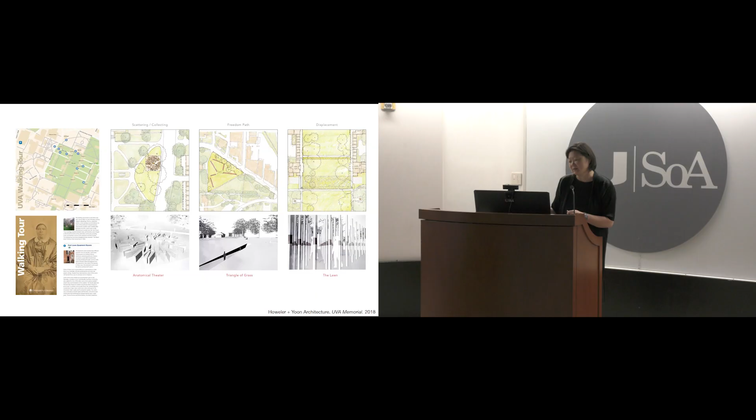We were surprised by how some of the ideas that we thought were the strongest and most compelling were of no interest, particularly to the descendants of the enslaved.

The right scheme was one of my favorites, and it was a purely ephemeral memorial where we would plant crocus plants, and they would bloom every spring and turn the lawn purple. But what we heard from the community is they wanted a physical space, a place to do the kind of reckoning of this history, a place where the community could gather. Ultimately, it was clear that the memorial had to create that space.

The idea of a kind of gathering in a circle—this is an ecstatic dance called the ring shout. And these ideas of gathering together to commune and pay respects became the driver for the design of the memorial.

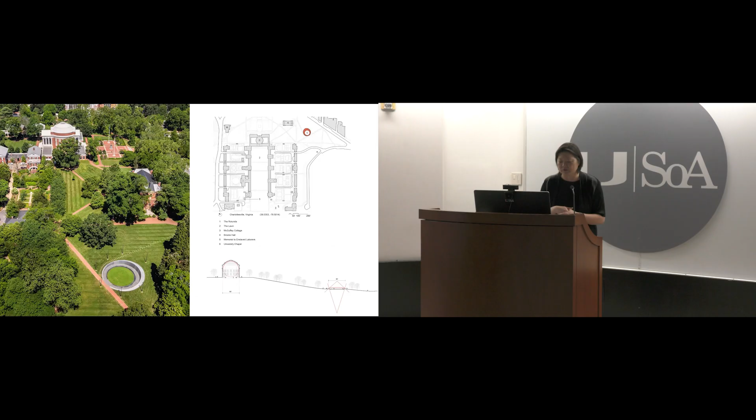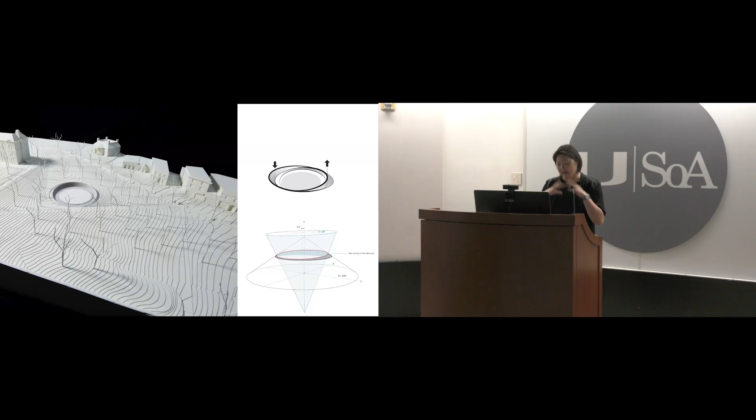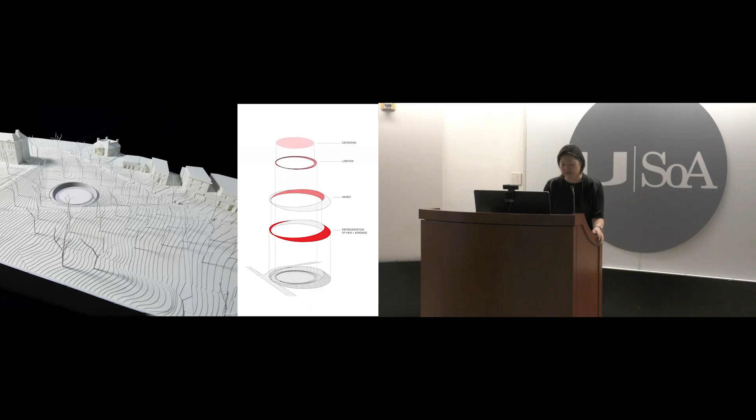So it's on one hand quite simple. It's a circle that intersects a path on a tangent. The diameter of the memorial is the same as the diameter of the rotunda, but the difference is the memorial is essentially two intersecting cones, a conical section that's open to the sky versus enclosed. That simple geometry gives us a place to gather and several surfaces to honor the enslaved, and try to capture in the materials the history as well as the present.

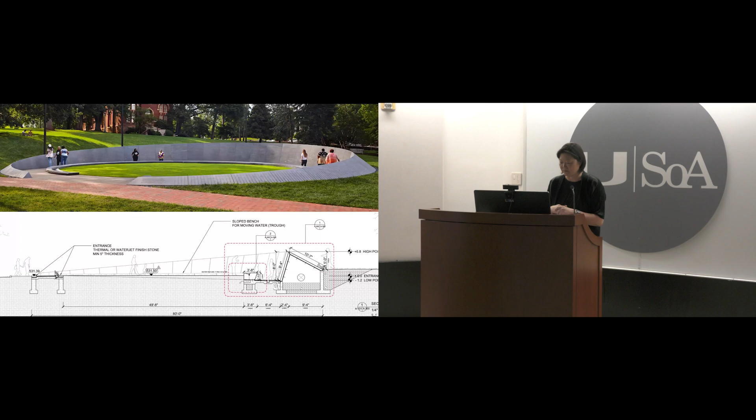So essentially when you enter, it's like a curb—very, very shallow—and the ramp slopes ever so gently down as the wall slopes ever so gently upwards. So it always creates a kind of openness, and a sense that there's no way to be out of sight. But when you're within it, it creates this kind of human scale to the project. The wall reaches 8 feet high, and it essentially creates a new horizon line in that landscape.

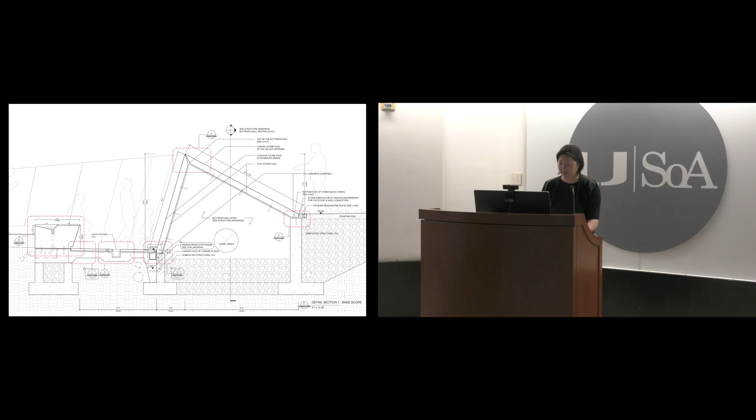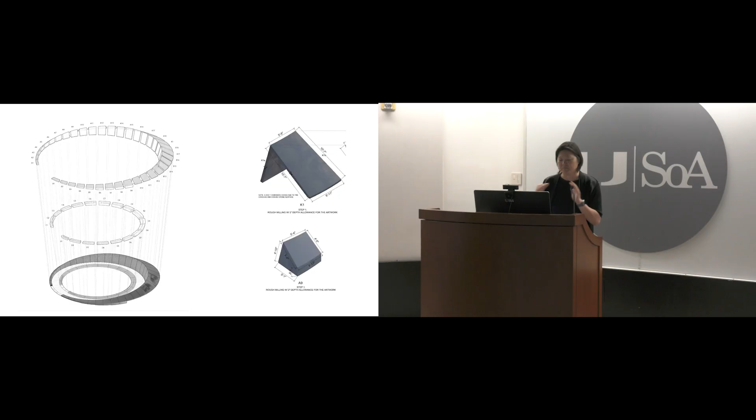And we worked on that horizon line very carefully through these full-scale mock-ups, really focused on how to create that line in the landscape where both the solid blocks of stones and the planar stones can come seamlessly together to create that horizon line.

And because there were an inner surface and an outer surface, the approach to them was quite different. The outer surface, we were really conscious of the kind of material artifacts of the time, these unmarked gravestones that were really rough because they were not honed—there wasn't the ability to hone those stones at the time. And we saw each surface as telling a part of the story of this history. So the outer surface has this kind of rough-hewn element like the tombstones.

And they're created by both the kind of striation and the scalloping of the surface. And in seeking whose voice to lift, we settled over time on Isabella Gibbons—her words. She's the only enslaved person that we have a photograph and a description in her own words, as well as a first and a last name. So the memorial starts with a quote from Isabella, and we worked with amazing artists, Eto Otitigbe, who did this piece called Becoming Visible.

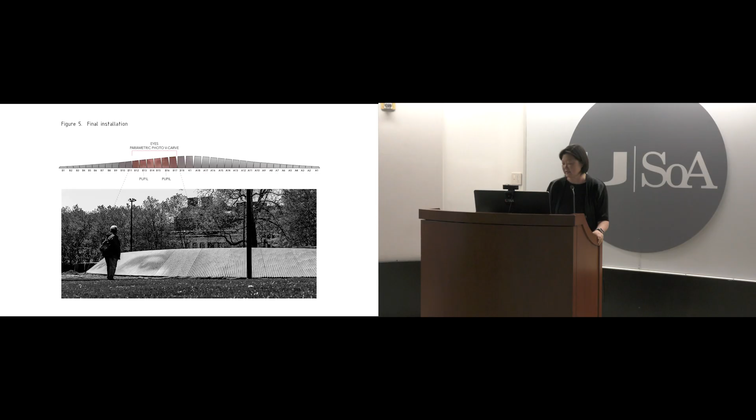And one thing the community wanted was a literal representation. The abstractness of the memorial, they found, did not do enough work in terms of the literal representation of an enslaved person. So we took Isabella Gibbons's eyes to a colossal scale, and then carved her eyes into the stone through this V-carve method that's overlaid on the scallops, and worked hard to make that legible. So if you're there at certain times of day when the light is just right, from a certain angle, you see Isabella Gibbons's eyes staring back at you.

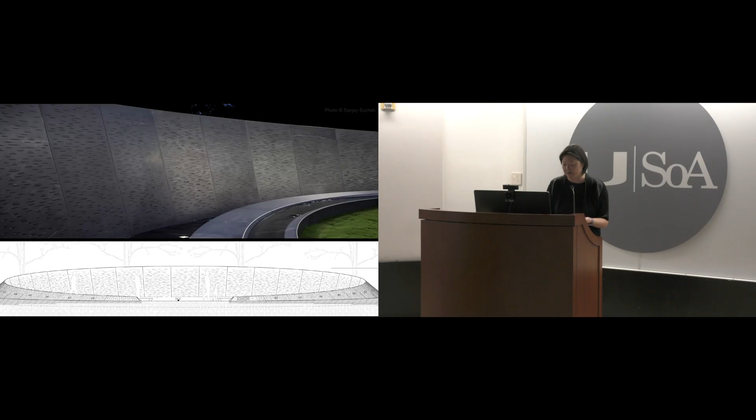We also struggled with how to represent the individuals. In a memorial, typically you have names, and here we know there were 4,000 enslaved people, but the records of their first and last names are in fact very, very few. So we made the decision to create 4,000 memory marks, and where we knew a name, a first or last name, a kinship relationship, or a skill, or their craft, we added it to create this kind of genealogical cloud.

And these cuts in the memorial are also crescent shaped and dig deeper. So after it rains, the water is held in that cut just a little bit longer while the surface dries around it, and then cries or bleeds the water after a storm.

And the memorial was opened during the pandemic, just after the murder of George Floyd. And we saw one person there taking a knee, and then a few more, and then a few more, and then many, many more.

Universities have long legacies, histories that often need repair. But universities, I think, also play a role in not only American values and ideals in terms of American universities, but I think they have a role to play in fostering democratic ideals, new knowledge creation, justice, truth. And so a project that we are working on right now at the University of Virginia is the design of an Institute of Democracy.

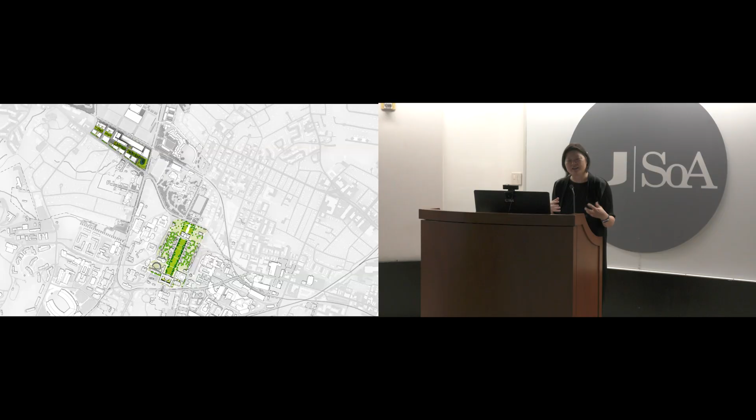And it's really interesting, having worked on the memorial and understanding the history and the important history of that academical village. UVA is expanding on this Emmet-Ivy corridor, and there's new disciplines, and those new disciplines like data science need new buildings, and so there's a kind of encapsulation of the moment of knowledge today.

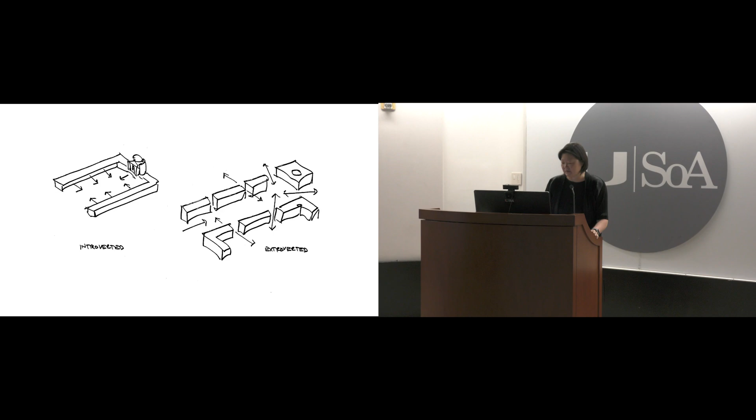And the decision was made to have the buildings terminate similar to the way Rotunda terminates the academical village, with the Institute of Democracy. But the difference is we wanted to create a kind of porosity to the building. We considered it a building with many doors.

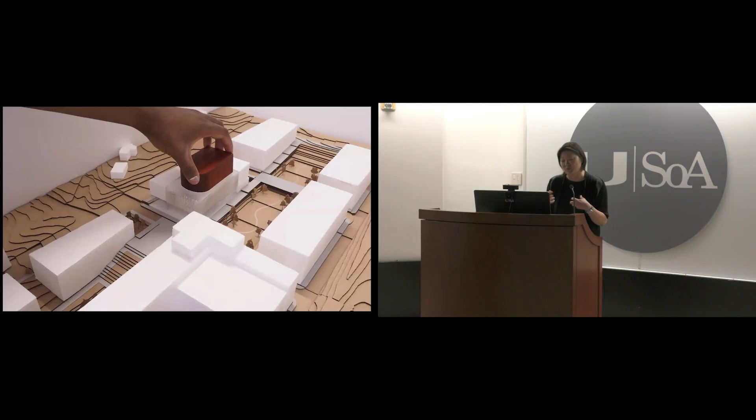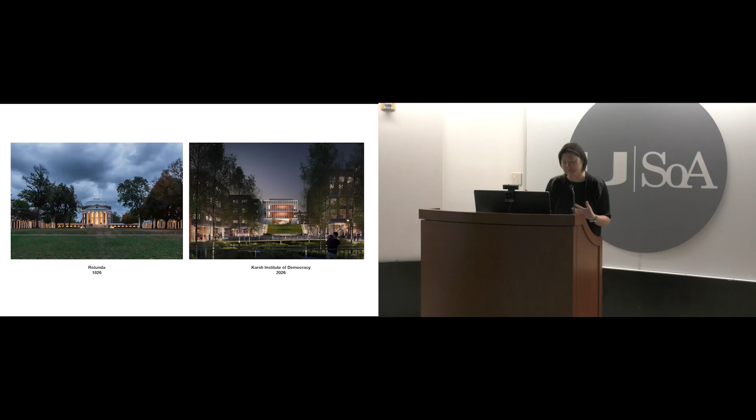That's anchored by a place of gathering and a place of discourse and debate, which is the hall. There's some relationship between the rotunda and the Institute of Democracy, in that they both terminate an axis, but there are many differences. In building in this context, one has to balance that reference to history with the new.

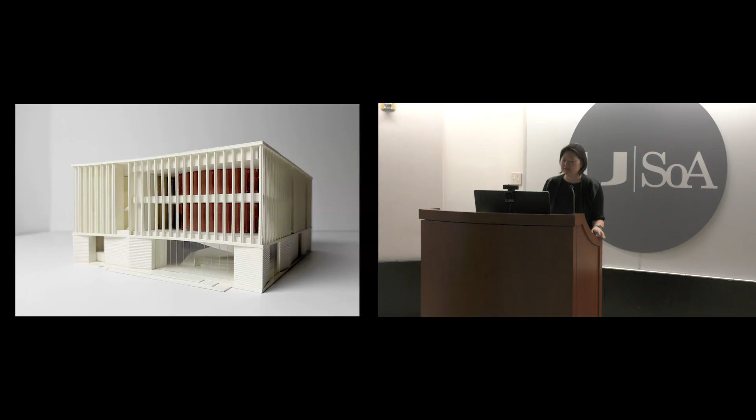The rotunda then becomes the deep red—here it's wood versus brick. But the organization of the building is really based on new knowledge production, deep research, and then discourse and engagement.

With the public, and engagement in debates through these public events. So the diagram of the building really is this simple: it's like two L's framing the place of gathering, or the auditorium.

So we made it 360 so that it's not left, right—there are many layers, and you could have every vantage point within the space.

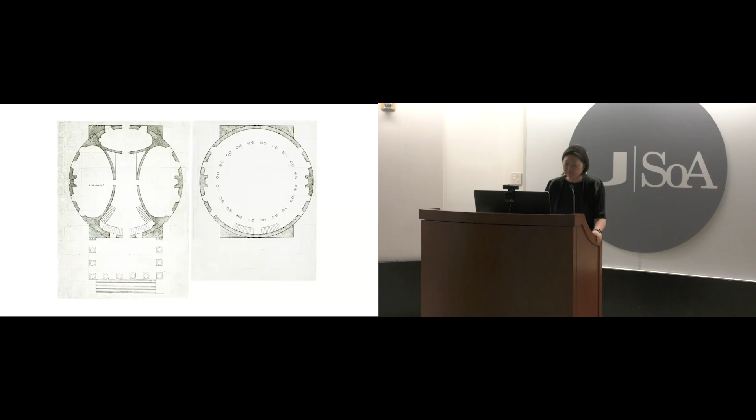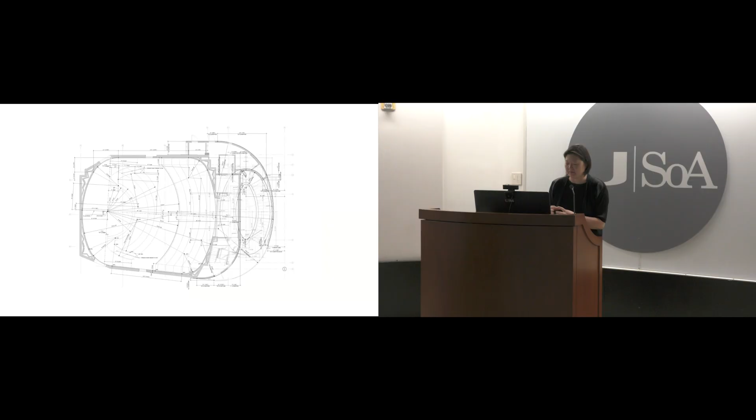And those geometries, which are really pure in the rotunda, are a little modified in the auditorium. So this is both the stair and the auditorium, and also a boardroom.

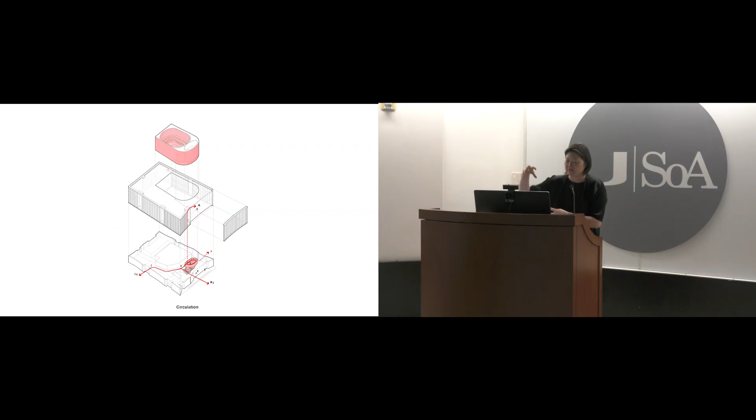So things are under construction now. We call it the avocado, but the auditorium is then connected to the ground through this tail, which is a spiral stair that takes people directly up to that event space from grade.

The other thing about the building we wanted to make sure is that there are multiple centers, and those centers are outside of itself, as opposed to a kind of simple axial relationship.

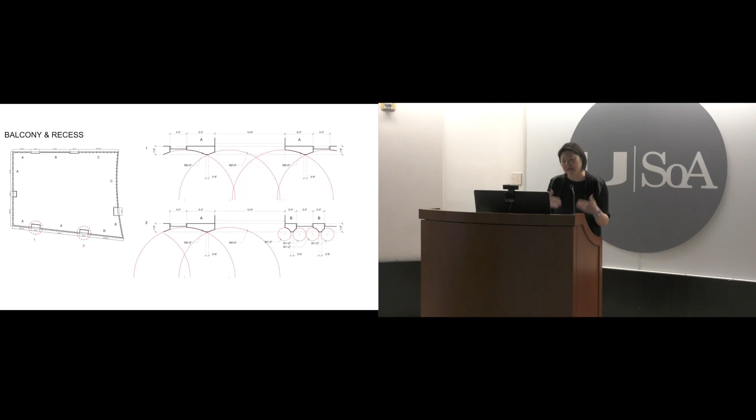And so even in the thinking through of the piers and the envelope, these precast piers reflect all those geometries that are external to itself.

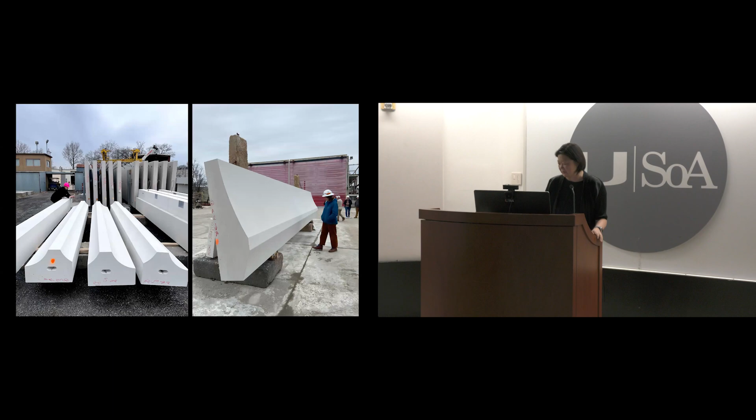And so this is the individual elements that create the different scales between the research wing and the auditorium wing, and then coming down on the cornerstones of the building.

And the last thing that I think ties it back to the memorial for enslaved laborers is that we had the opportunity to create a pilot project in the Design for Freedom movement, where we are going through the process and requiring the contractor to go through the process to document all the procurement of all of the materials of the project, to ensure that there is no enslaved labor throughout the material sourcing.

I wanted to share—often we think adding something is purely additive. But some of the recent work we're doing has put a deeper understanding, and sometimes you need to add in order to preserve.

So I'm going to share a few adaptive reuse projects that are quite different. The first is this Coolidge Corner Theater in Brookline. It's a nonprofit independent movie house, and they have this beautiful old theater, and a desire to create an addition in order to preserve it.

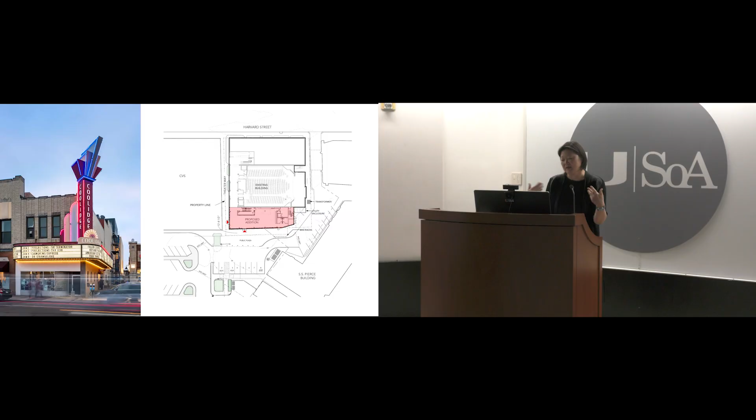So we were asked to do an addition that would turn the back of the theater into a new front, provide it with two new theaters that would allow it to meet code and accessibility requirements, elevators that it needed. But it also allowed the theater to remain in operation during the construction of the addition.

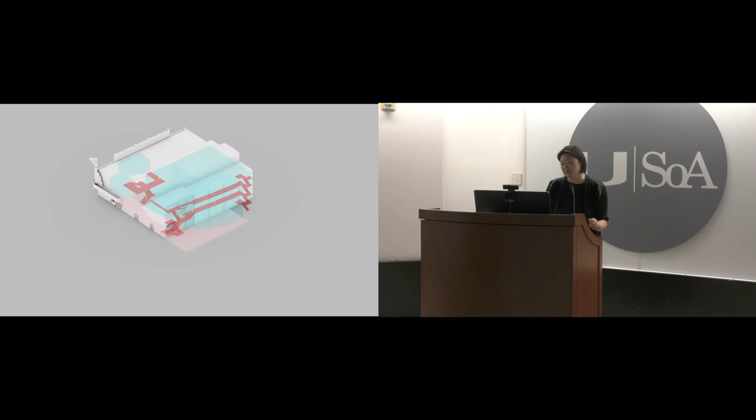So it's very straightforward: two new theaters, new integration of the circulation route. And you can see the kind of line between the new that enabled the old to be preserved. The theaters are just two theaters, very different in scale.

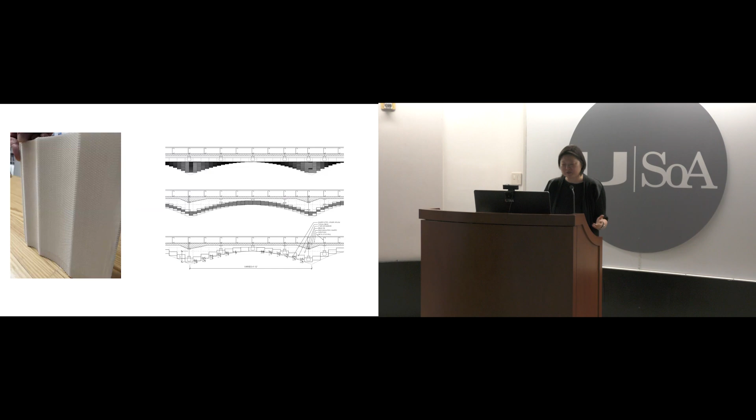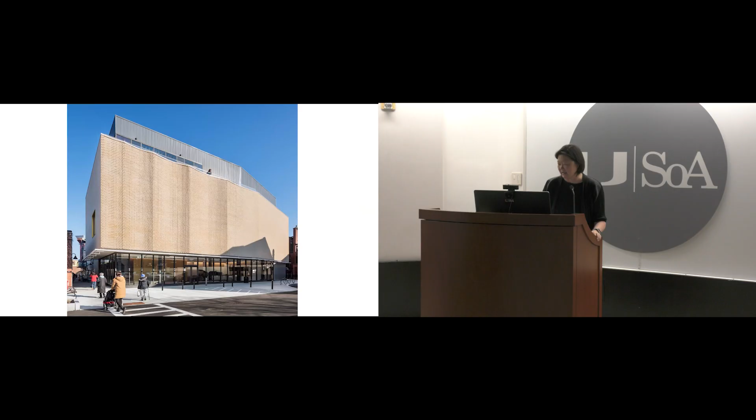And because this building is Art Deco, one of the requests they made was to make sure the building was deco. We struggled with that quite a bit, but in the end we utilized similar material as the original theater building, and created this undulating facade that has that quality of billowing curtains, but is all done through hand-laid brick. At night, it really captures that sense of expectation.

A very different approach to adding to preserve is a project we're doing in Buffalo. This is the new Lipsey Architecture Center, and it is part of this larger complex called the Richardson Olmsted campus. At the time, the language used was an insane asylum, so this was a large campus for the mentally ill, and it has its own storied history.

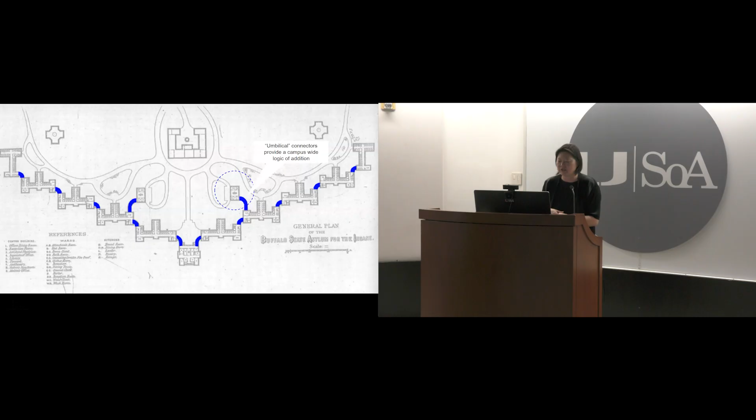We have both the opportunity to preserve this building. There's so much embodied carbon in our buildings, but this building is too small to house the architecture center. And the economy of Buffalo has become one tied to tourism. So the desire was to create a new structure that didn't compete or try to look like the original, but one that would be quite iconic, different but iconic, and part of the attraction of coming to the site.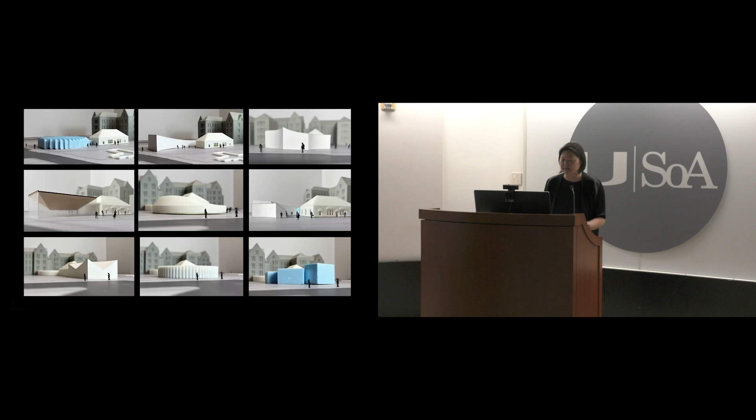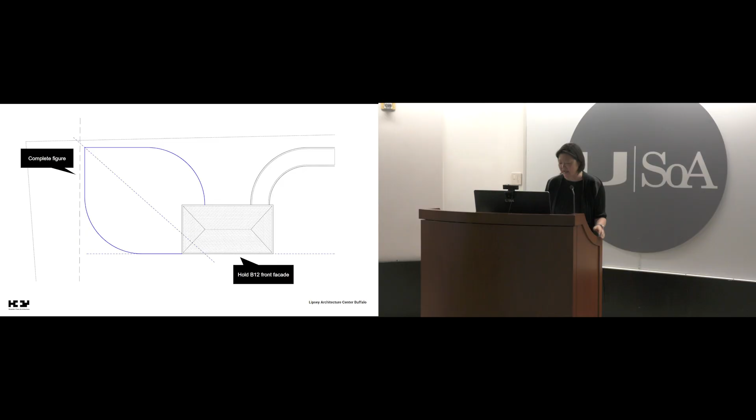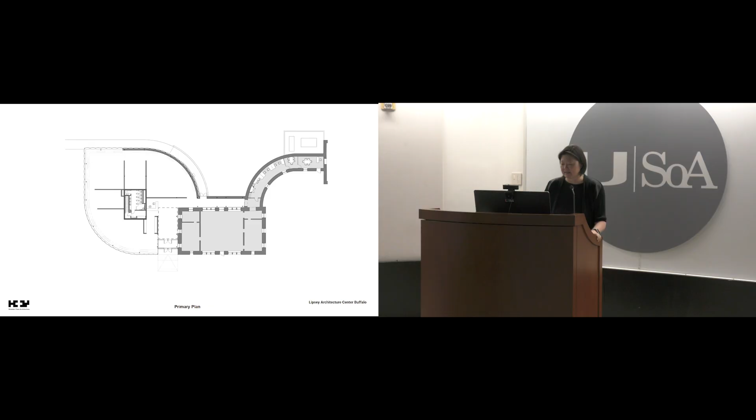So we did lots of different models, and in the end, we found resonance with a very simple scheme where we simply mirrored the geometry of the connector piece. We mirrored it again to complete the figure. We created an entry between the old and the new, organized all the support services in the center with the galleries pinwheeling around, made sure it was diminutive to the roof line of the existing structure, and then clad it in these curved pieces of glass.

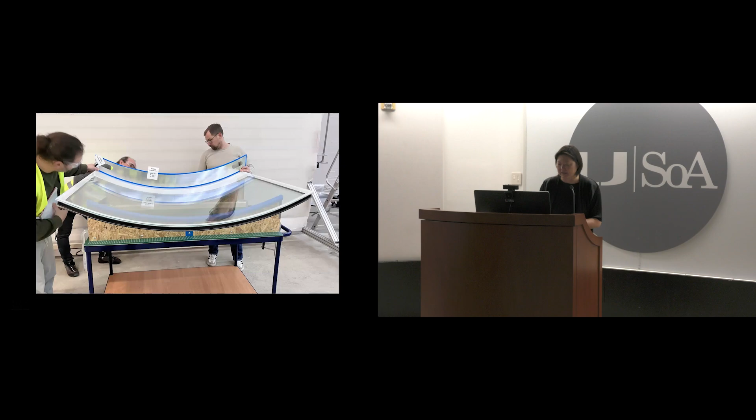These curved pieces of glass have been really interesting to work on in terms of thinking through the mullion, and whether we could do this as an almost mullion-less system. We're working with a glass manufacturer in Germany to fabricate these pieces. So these are the early mock-ups that you're seeing, and it's under many feet of snow in Buffalo, and should be completed hopefully by the end of the year.

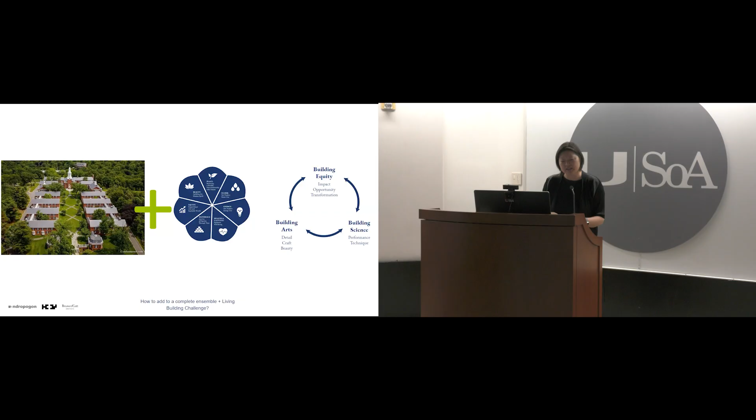Another kind of add to a historic site is a project recently completed for Yale. Yale's Divinity School was really based on the academical village at UVA. One of the opportunities here was our first chance to do a living building challenge building. This was in collaboration with Bruner/Cott and Andropogon. Really, the living building challenge expands things from just performance and sustainability to equity and beauty as part of the criteria for meeting the challenge.

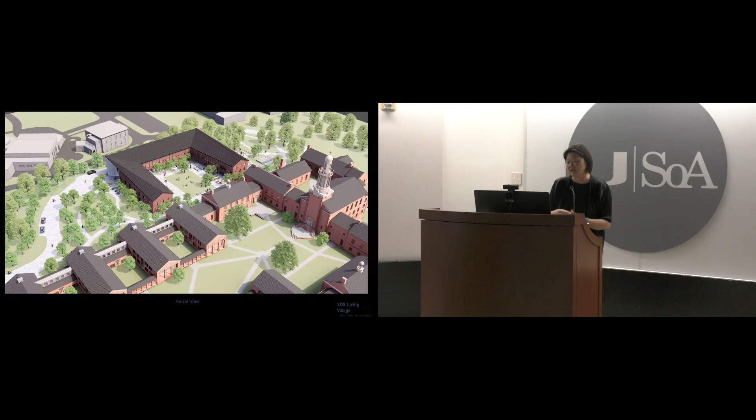And there, the kind of axial orientation of the campus was no longer viable in its expansion. No one could find the right door. So the decision was to make a kind of courtyard space that would essentially house another 50 students. So this is a 50-bed dorm, but what's incredible about it is the research and development of

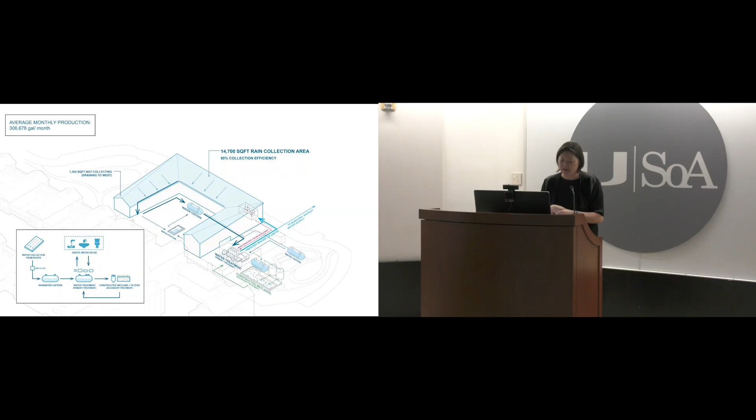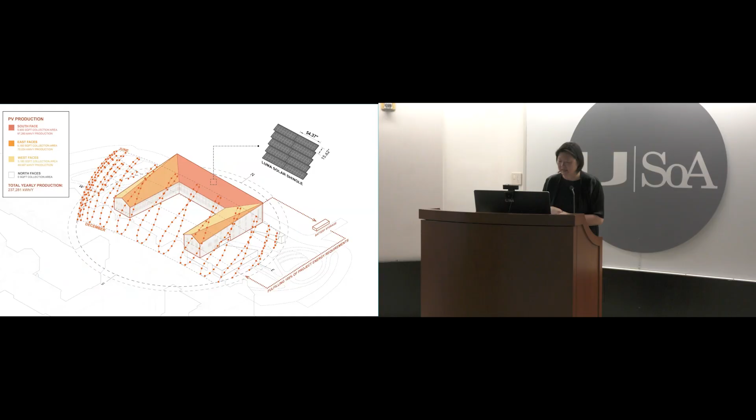incredible resilience and sustainability standards. So the goal is to produce more energy than the site can consume. The whole roof is a solar panel. We worked on tweaking the geometry to maximize the harvesting of solar energy. The technological advancement of these panels now, in the form of roof tiles, is shocking in terms of how well those products perform.

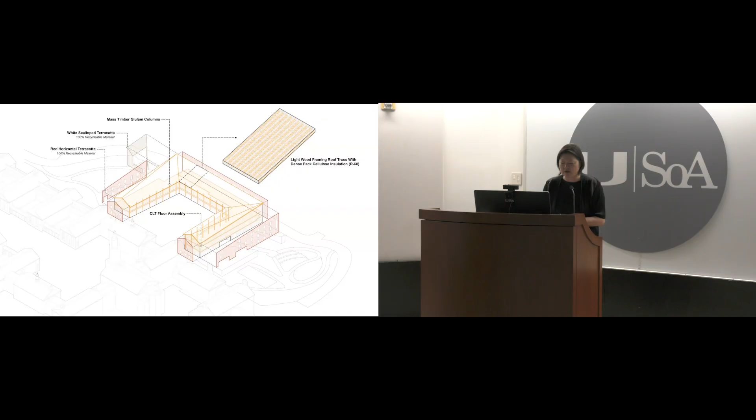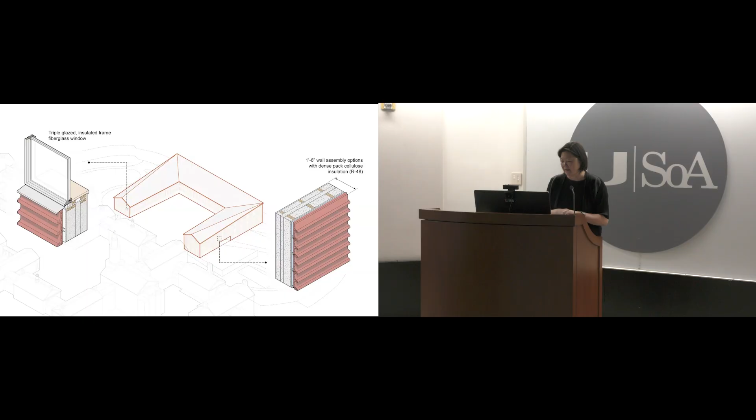The building is essentially mass timber, cross-laminated timber, glulam structure. So it's almost all wood. A lot of that CLT is exposed, triple glazed, and then terracotta for the skin.

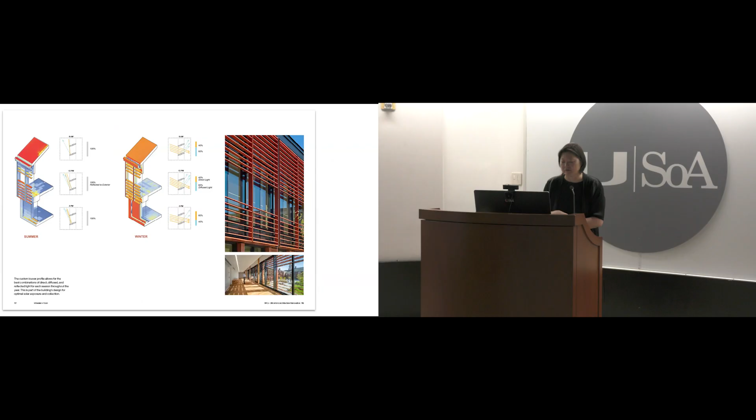But there's this one detail I wanted to focus on, which is the drip edge that's built into the existing historic buildings that sheds the water off the brick. We thought we'd use that exact same profile for the terracotta cladding, to have a kind of resonance with the existing building, as well as use that profile to create the louvers that really manage the performance of the building from a solar gain perspective.

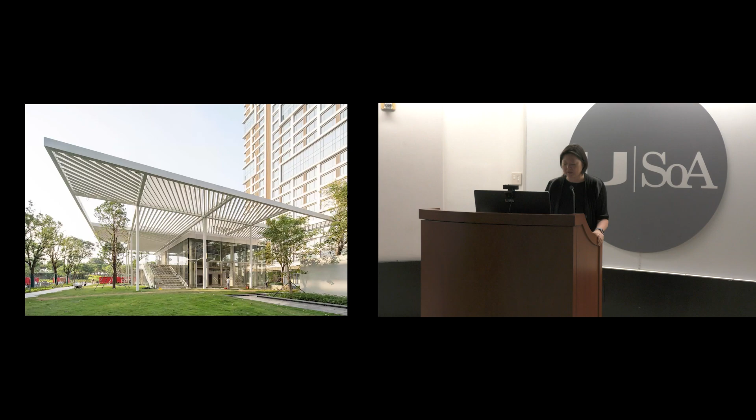So you can see here old and new, maybe the formal expression quite similar, but the performance, of course, entirely different. The other little nod to the history is the whitewash paint on the brick. And so we have this moment where you cut through the geometry of the building into the courtyard, utilizing that same kind of white as a cut through the building. I think even at the smallest detail, one can innovate, and through one detail element really impact the performance of the building.

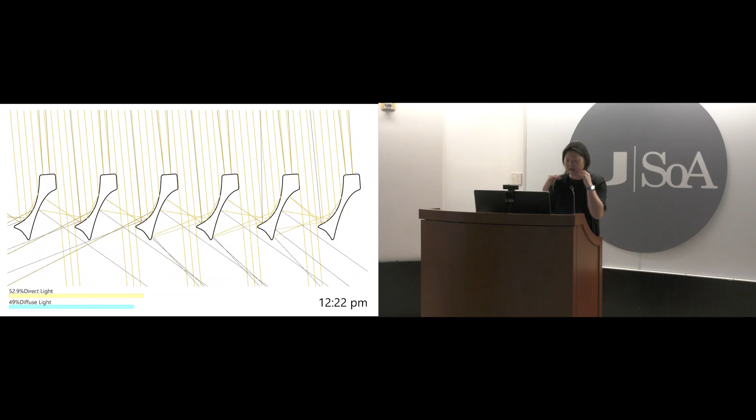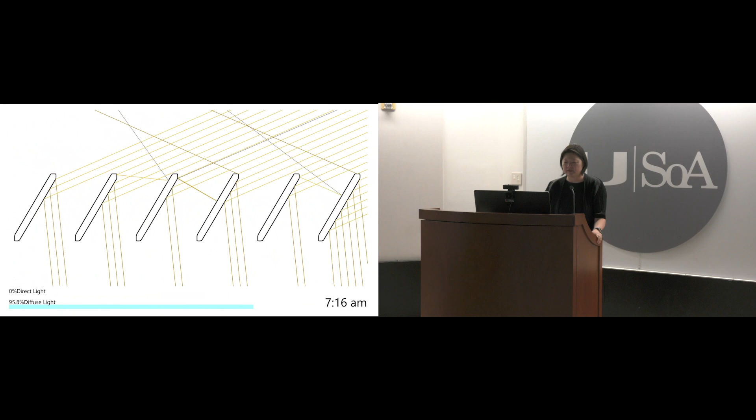So this is a slightly older project, just south of Hong Kong. We worked on a structure that is basically a simple glass box, but with a mega canopy, and worked on creating a kind of louver that would maximize the light, but minimize and reduce the heat.

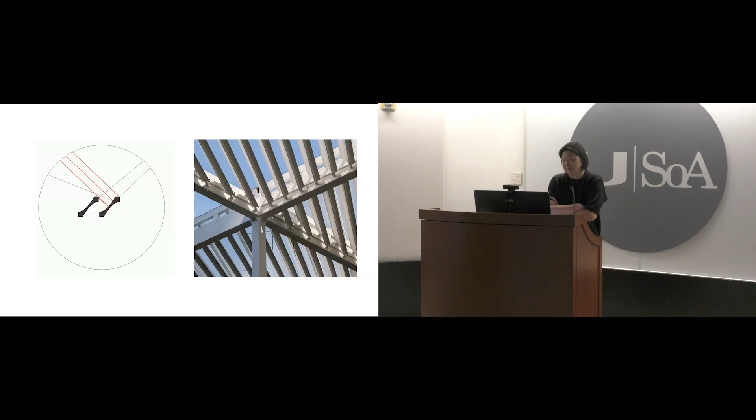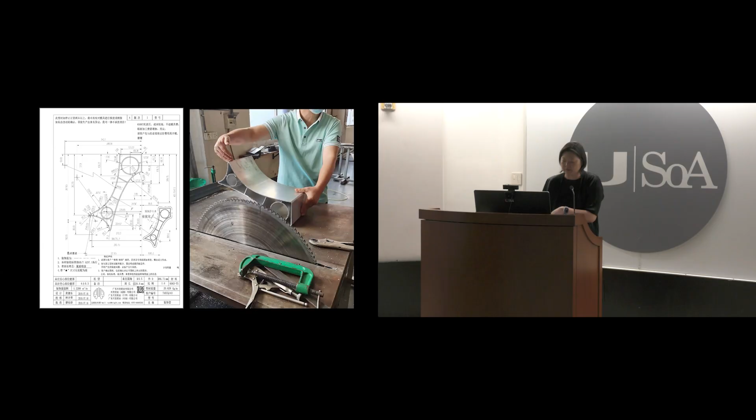And we found that in China, we can test things in terms of construction and fabrication in ways that have been harder to do in the US. So this is a kind of custom die-cut louver, which would be very hard to do with small volume in the United States, but it creates this kind of beautiful light-filled canopy that is a shade structure to the architecture below it.

The other way I think architects gain capacity is through pooling expertise and building new knowledge. One of the older projects, the Collier Memorial, I had the opportunity to collaborate with amazing engineers.

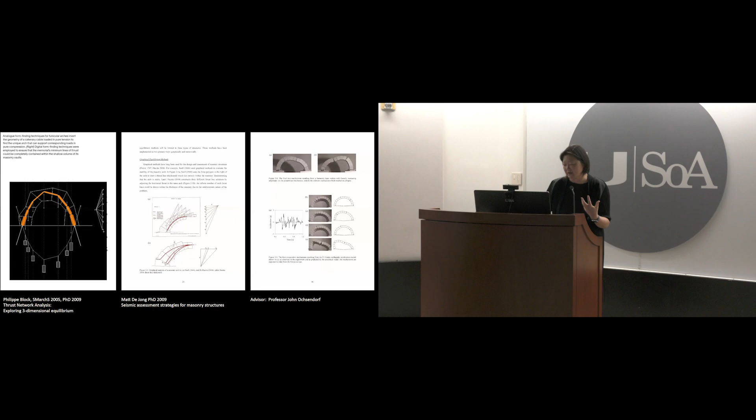What was interesting was that it built on the knowledge of academic doctoral theses and student projects as the foundation for the principles used to guide this shallow half arch vault, which is fully compressive. There's no post-tension steel in it. It uses just gravity and force to create this fully compressive structure.

What was also fascinating to me was I always thought engineers had the answer and architects were the ones always debating. But in fact, you put 5 engineers in a room and they will all disagree on what is possible, because they're also factoring in constructability, risk, and not just the pure math calculation.

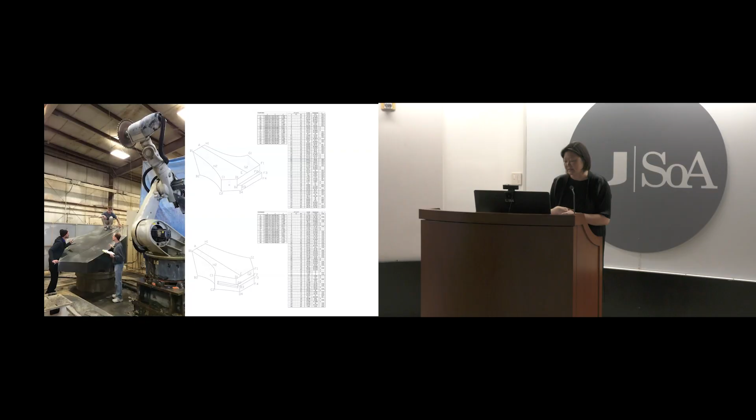So that project, the Collier Memorial, really led to a kind of exploration and partnership, not only with structural engineers, but also with fabricators and masons, and really learned to respect people's craft and the incredible decades, sometimes centuries of knowledge that people hold.

We were able to treat the project like a research project. The engineers weren't actually 100% sure if it could be fully in compression without adding the grout in, but in fact, it was pretty close.

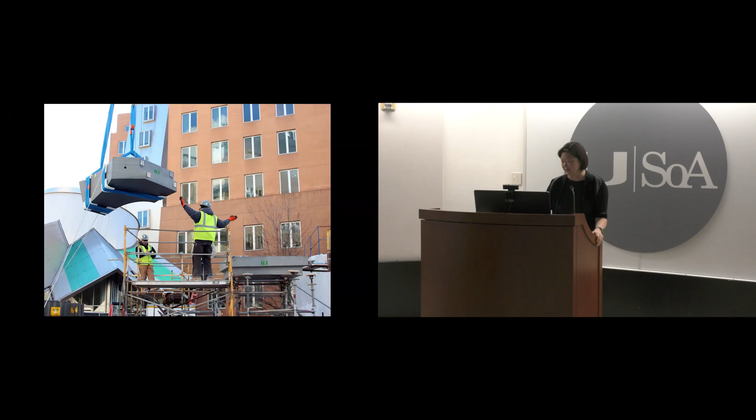The other thing we learned is how driven the costs of any building are by the time of construction. So thinking through how the memorial would be assembled, the whole full sequence became critical.

So I mentioned that because I wanted to show 2 projects, one that learned formally from the Collier Memorial, and one that learned, I would say, tectonically and from a construction perspective from the memorial.

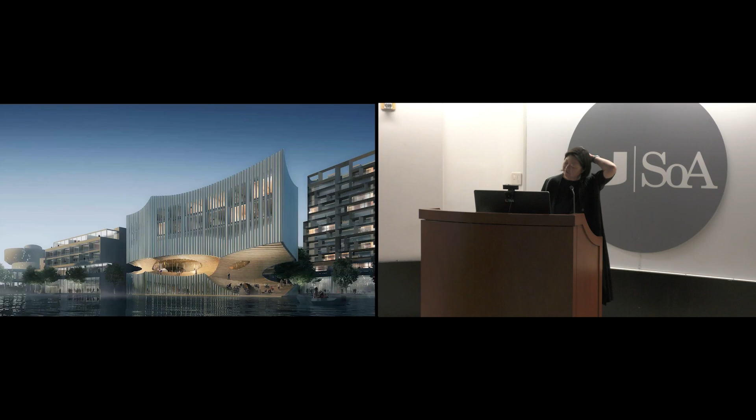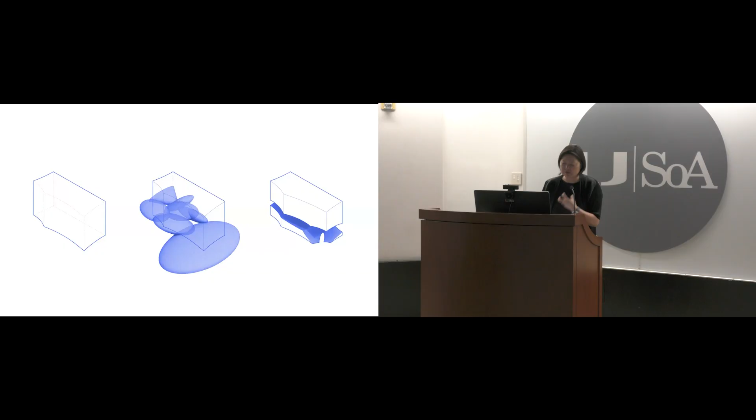Rudolph reminded me that I showed this project, which was just a rendering, I don't know, was it 8 years ago? Similar to the Collier Memorial, there's a kind of Boolean formal technique used to carve out the center, and that allows this cross view at the ground plane level.

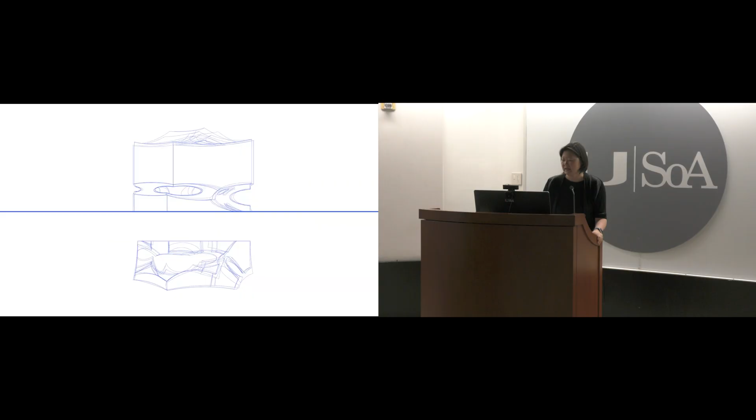That kind of porosity through the carving of the ground level and elevated ground level, because it mediates a section, really drove the design of the project, connecting to the water and the landscape beyond.

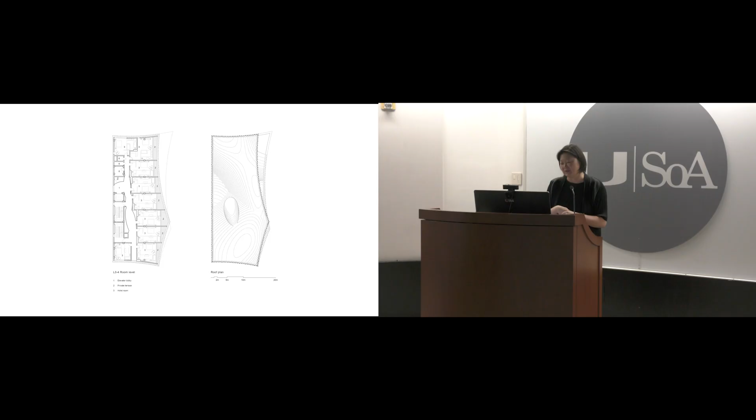It's been under construction for several years now, and is recently almost done. It's a boutique hotel, a wellness center with just a handful of rooms.

But those rooms need a view out, and yet the formal geometry wants to create a kind of tautness to it. So working there with a kind of custom extrusion that allows the envelope or screen to snap in this manner has been incredible to watch.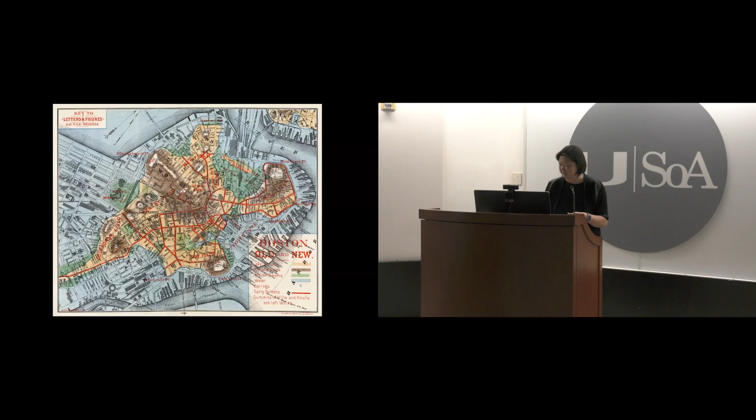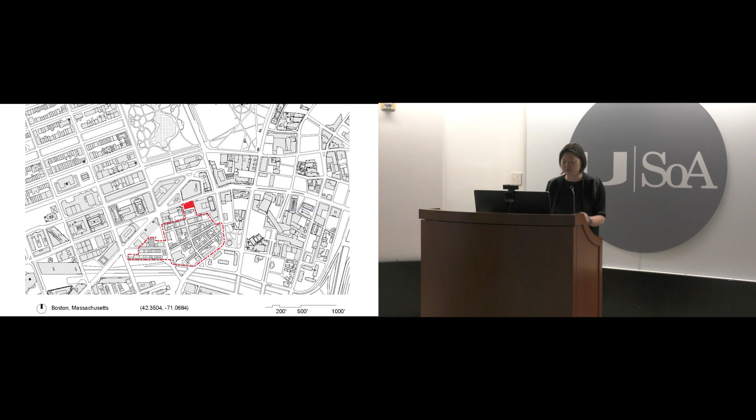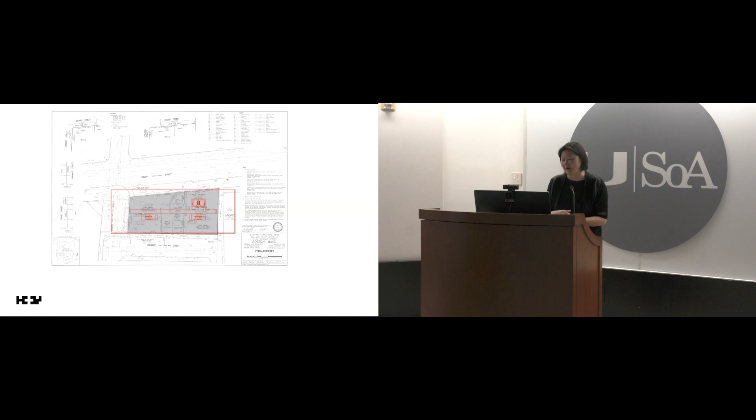So the clients asked if we could design a building on this tiny footprint. The things that are going to drive the costs are really construction. The other criteria was that it couldn't feel like a cheap, thin building—they really wanted to capture the depth of the materials in that neighborhood context.

So we did a number of studies, and the project we ended up settling on was a building of two sheared volumes, which would take the fluting of the architecture around it, but create those flutes in such a way that they could be multi-story.

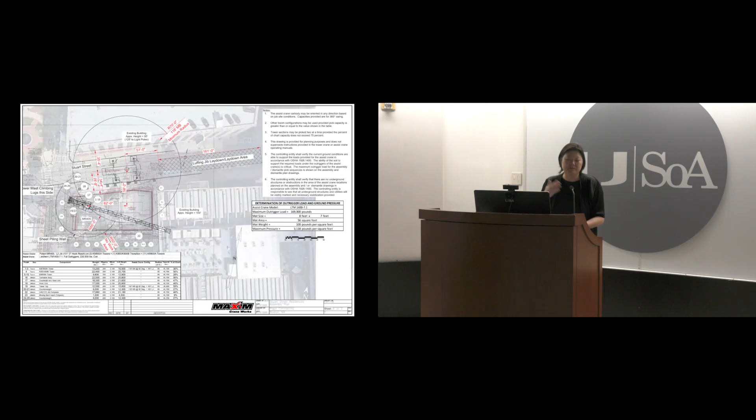What drove the whole project was the crane and the erection sequence of these multi-story panels so that it could be built as quickly as possible. There are several types and they're aggregated together. We actually thought, before we worked with the precast fabricator, that the goal is to minimize the number of molds, but we learned that the molds are not expensive.

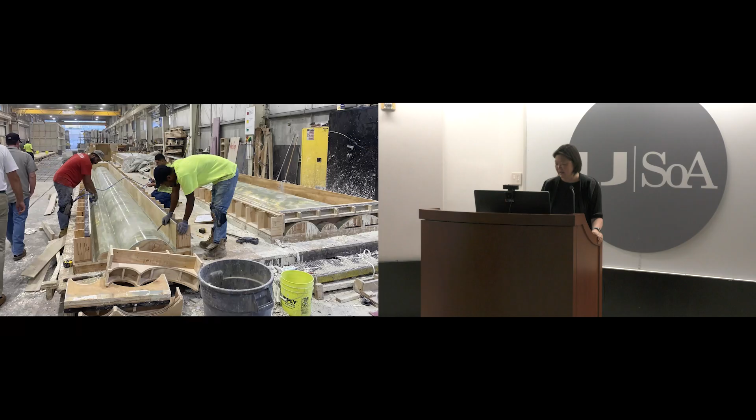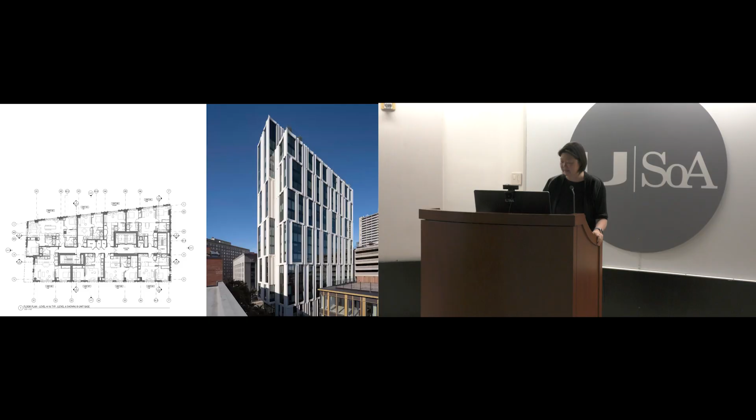And the thing that drives the cost is what they call the minimum number of picks, the pick point on these panels. You can see some are 2 stories, some are 3 stories, and some are even 4 stories tall to complete the project.

Then the other important innovation of the project, which was unknown to us at the time, was that the neighbors in the townhouses really didn't want a back to the building. So this building has no back for loading, since they didn't want the loading on the back. The other small innovation we made that enabled it to get the neighborhood's approval was the creation of 2 small townhouses. So it's like a tower with 2 townhouses at the ground level, and you can get into your townhouse both through the lobby or through your front door.

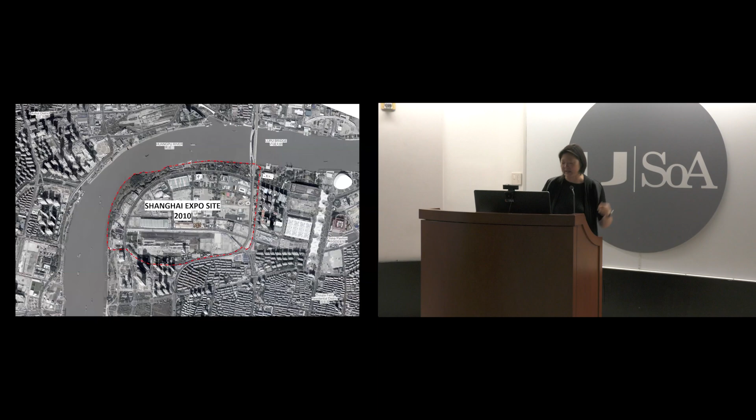And I wanted to close with 2 projects. One, the Moongate Bridge, which was also a competition on the Shanghai Expo site. This is a photograph of after the expo. I don't know if you recall the expo, but Heatherwick had his amazing UK pavilion at the time. That was his breakout project. But after 2010, the site sat vacant for almost a decade.

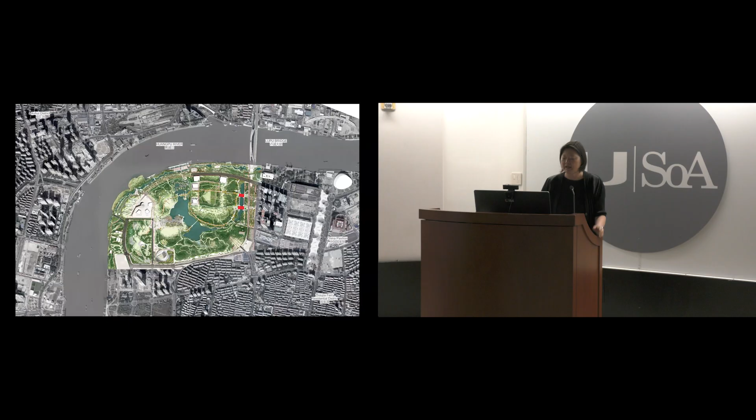In the meantime, the city just kept expanding and growing around it. So a decision was made to turn this expo site, previously on the periphery of the city but now becoming part of the center of the city, into a kind of cultural park for the public, a kind of lungs of the city, a la Central Park. And there was a competition to design 2 bridges.

One of the things we really appreciated about bridges in China is they're not the most immediate point A to point B contact. The bridge as an experience becomes critical, less about the destination and really about how to turn it into an experience itself. So the idea was to go from two bridges to thinking of it as a big plaza with a hole that framed the water.

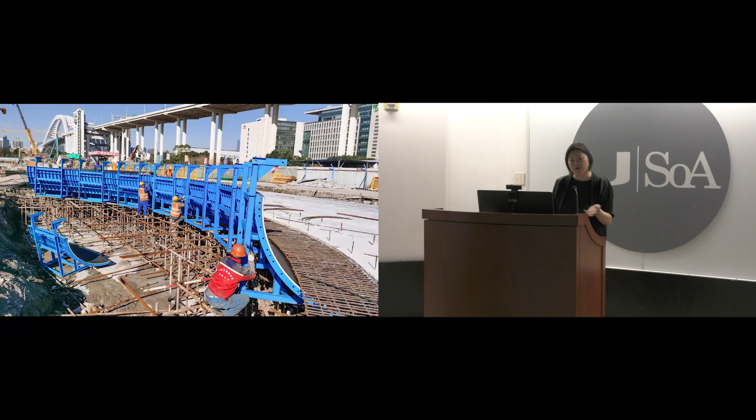So that was the concept, the rendering, and this was built also during the pandemic. It curves in both plan and section, and that curvature reflects the water below it. Then on the interior, we use these modular elements to create a more human scale to the project.

And the last project is also in the water, recently done for the Venice Biennale and also at COP30 in Belém. The goal was to build further discourse around climate action and sea level rise.

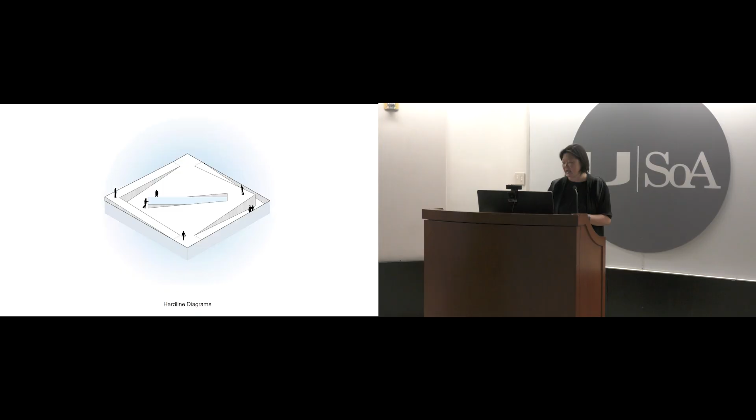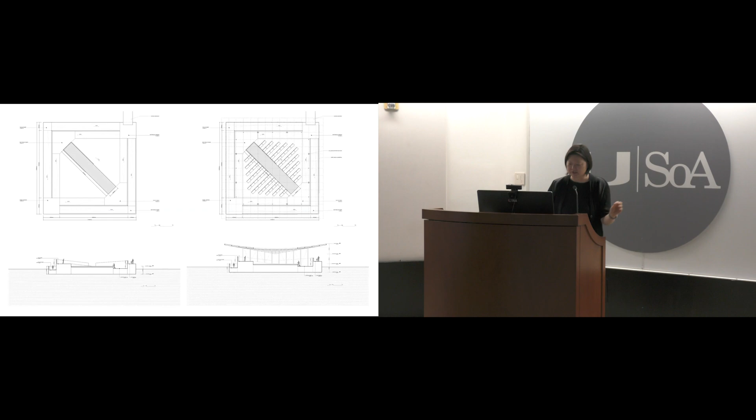We designed with Carlo Ratti this floating plaza, as if it's displaced from the city. It uses just geometry and buoyancy in order to float, and float exactly at the right level, just a few inches freeboard above the water.

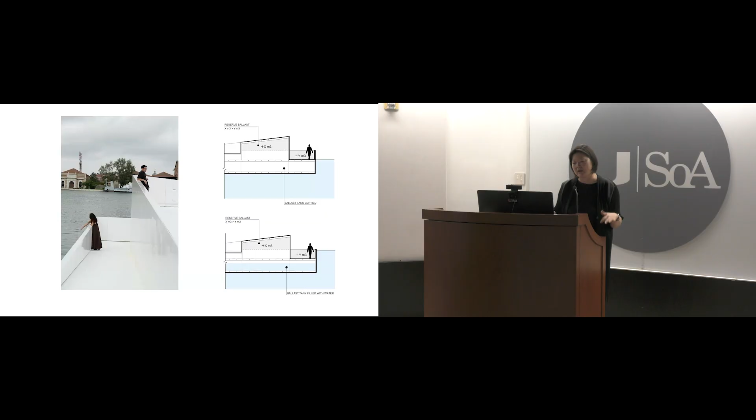Here you can see how it fills with water in order to sink to a certain level, and it pumps the water out in order to rise. We created this pool in the middle to bring your attention back to the water and the transformation of the planet with the glaciers melting.

The idea was that it would be in Venice for the Biennale, but then it would go to COP30 in Belém. This was a gift from the Italian government to the Brazilian government. Because in Belém it becomes a permanent structure, it gets a canopy and a roof, and then became a site for conversations and talks and lectures on climate change.

This was just after Buckminster Fuller proposed his great logistics game, which was an anticipatory design tool that conjectured how to overcome energy scarcity and territorial politics through the redistribution of the world's resources. His goal was to usher in a kind of new resource consciousness, which I feel like our discipline has at the moment. I wanted to quote him to end: to make the world work 100% for humanity through spontaneous cooperation and without ecological offense or disadvantage to anyone.